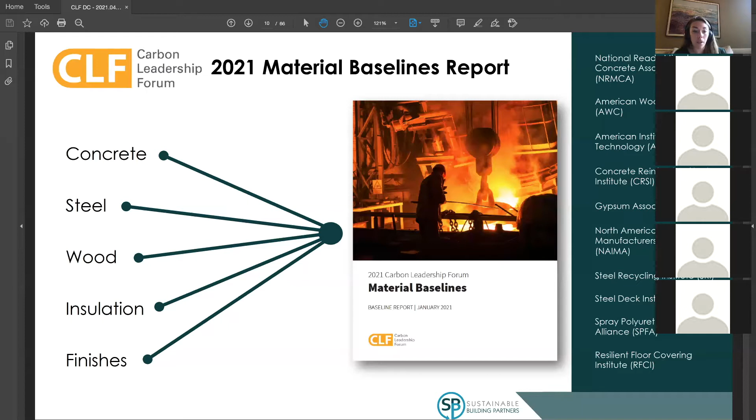We see these baselines pop up in benchmarking tools such as Building Transparency's EC3 tool. LEED has also introduced a procurement of low-embodied carbon construction materials pilot credit, where the intent is to show a reduction in the embodied carbon of materials used in the building compared to the CLF material baselines. So the CLF material baselines is a great resource for us to compare materials against an industry average and make more informed decisions on our material selections in terms of embodied carbon.

Here's a snapshot of what the CLF material baselines tables look like. They're outlined by material categories such as insulation, concrete, and steel, and are further broken down by material subtype here. Three different embodied carbon baseline levels are provided for each material subtype, like low or achievable, the typical or median, and the baseline or higher level, based on industry average carbon emissions data. Some subtypes show a wider range between the achievable and higher baseline values due to the variety of materials included. For example, in the insulation table shown here, the board insulation subtype includes mineral wool and EPS, which have varying carbon footprints.

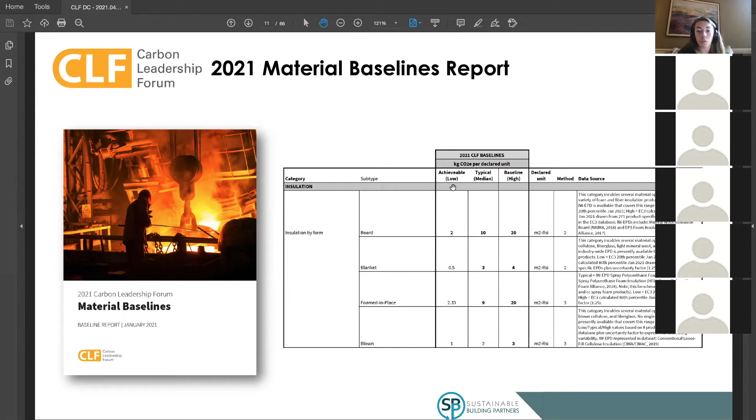The EC3 tool uses the achievable, low, or lower CLF baseline figures in the benchmark to encourage movement in the industry toward materials with lower carbon emissions.

Building Transparency's EC3 tool takes the CLF material baselines and creates an interactive tool that can be used to compare materials with EPDs against the industry average benchmark. Here's an example looking at XPS board insulation on how a less carbon intensive product can be chosen by comparing material options.

I've used the example of the original Owens Corning Foamular insulation as an early design option that is a typical chosen XPS insulation in the industry. However, if compared during design to other available products, we can find that we might be able to get closer to, or even lower than, the baseline.

You can see on the EC3 box plot that the original Foamular XPS insulation, shown here as our early design option, hits the conservative end of the graph, whereas the new Foamular NGX product hits the lower achievable end of the scale, below the CLF baseline. This is an easy example because Owens Corning has recently optimized their original Foamular product and released their NGX XPS insulation, which uses a different blowing agent, resulting in a significant reduction in GWP without any change to performance.

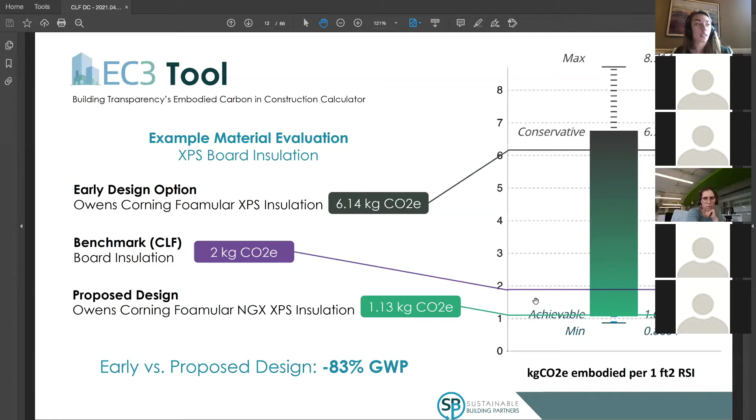The Sustainable Minds Transparency Catalog, which many of us use to find EPDs and other sustainability documents, is another tool that can be used to quickly compare products based on their embodied carbon. The Transparency Catalog reports results from the EC3 tool for products listed in their database. Results are listed as a percentile, showing where the product lands compared to others in a similar category.

We can see from the Transparency Catalog database that our original Foamular NGX, or Foamular XPS insulation, is over the 60th percentile, meaning that more than 60% of products in a similar category have a lower embodied carbon value, or kilogram CO2 equivalent, per declared unit.

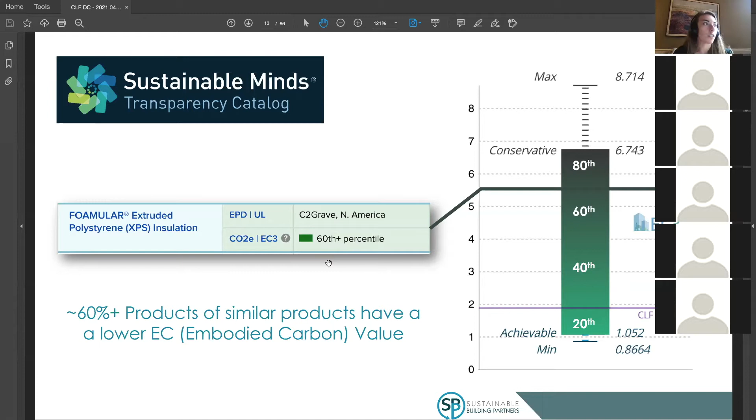With many materials we use in our buildings, comparing EPDs against an industry average benchmark is a good way to understand how our products perform in terms of their carbon footprint. However, concrete can be a little trickier since it's a complex product with a lot of variables.

The materials within our mix designs, such as aggregate, can vary based on location. We have many different mix designs to meet any and every performance requirement, such as compressive strength and exposure class requirements. In addition, the concrete PCR, or product category rule, does not include all performance requirements—it only requires concrete mixes be categorized by 28-day compressive strength. This means there are a lot of other variables not being captured in a concrete mix EPD, making them difficult to compare.

Most importantly, there just isn't a lot of data available to compare concrete mixes. Although there are some manufacturers in the area that have started creating product-specific EPDs for their mixes, such as Vulcan and Aggregate Industries, it has been slow-moving in the industry. This is likely due to the sheer volume and variety of mix designs, meaning manufacturers would have to acquire a lot of EPDs. All of these factors make comparing concrete mixes just a little bit more complex.

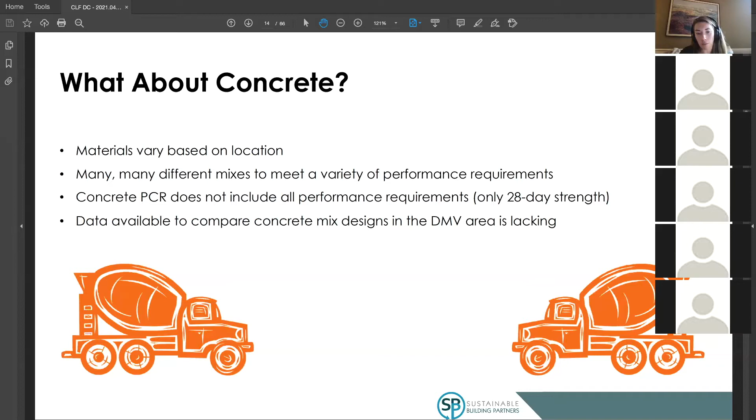So what is available to us and what can we start doing now? We do have the NRMCA ready mix concrete benchmarks that are available to us.

These benchmarks are comprised of industry average data from concrete manufacturers across the country. Even better, the NRMCA has categorized the data into separate regions, which can help to account for the materials available in those regions. For our projects in the DMV area, we can use the Eastern Region benchmark as a guide to see how our mix designs compare against the industry average data in our region.

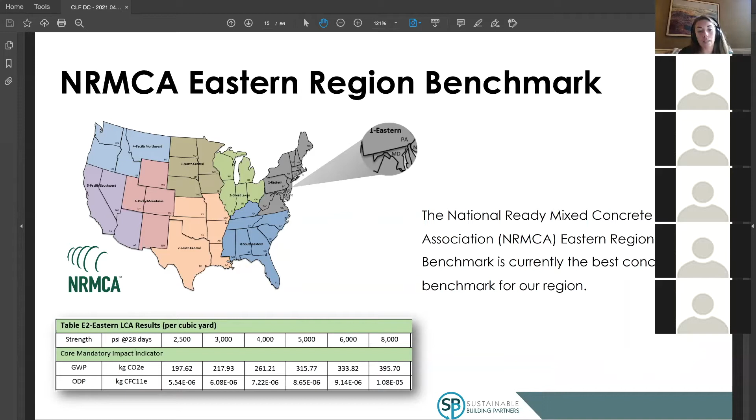Although the NRMCA data still does not account for variables other than 28-day compressive strength, it is currently the best ready mix concrete benchmark for our area.

There is also a tool available to help us compare our project-specific mix designs against the NRMCA benchmark. The ZGF Concrete LCA tool is a free interactive tool available to anyone, created by ZGF Architects using data from NRMCA and Tally.

It allows you to enter the pounds per cubic yard of the mix design components, and then the tool compares your mix to the NRMCA benchmark, whether that be national or regional. The tool can be great if comparing different concrete mix design options for a specific function, or getting an idea of what the concrete environmental impact and carbon footprint might be for the project.

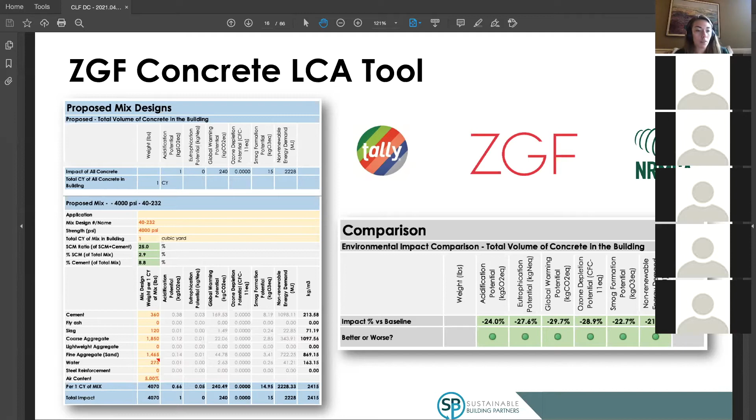It can also help to set project goals for reducing the project's concrete impact. At SBP, we are starting to use this tool to collect data on the mix designs in our area to get an idea of what is available. We hope to eventually be able to use this information to find concrete benchmarks for the DMV area.

Another great way for us to compare our concrete mix designs is to focus in on the cement used. Because cement is responsible for around 90% of the carbon emissions associated with concrete, it can be a good indicator of the environmental impact and carbon emissions of the whole mix design. With less variables in cement than in the concrete mixes that we use, it can be an easier way for us to compare and optimize our concrete mix designs.

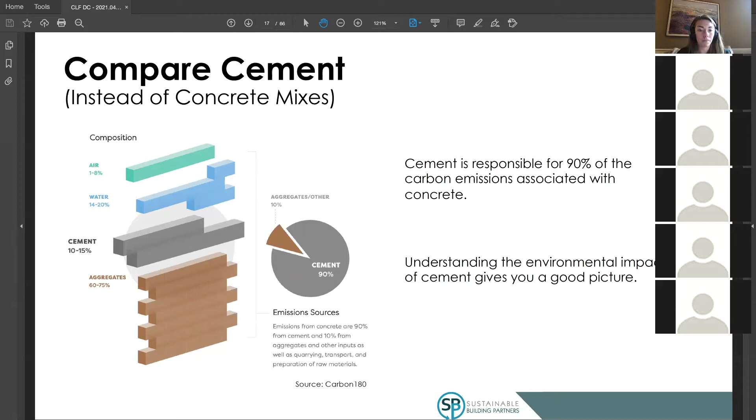As I mentioned earlier, one of the market considerations relative to concrete EPDs is that you need to create one for every mix for every plant, and that's a lot of EPDs. There are EPD generators becoming available to help streamline this process, but it's just still a lot of EPDs.

This is where cement EPDs become important. Although there are not many cement EPDs available in our area, they will likely become available soon by the cement manufacturers around. We can compare product-specific cement EPDs either to the Portland Cement Association's industry average or to other products available, without the variability that comes with the whole concrete mix design.

Cement EPDs can provide clarity on how a mix design will perform, and it's an important part of creating low carbon concrete. Bringing it back to what we can do now, we can start to request cement EPDs from our suppliers so that they become more available in the market.

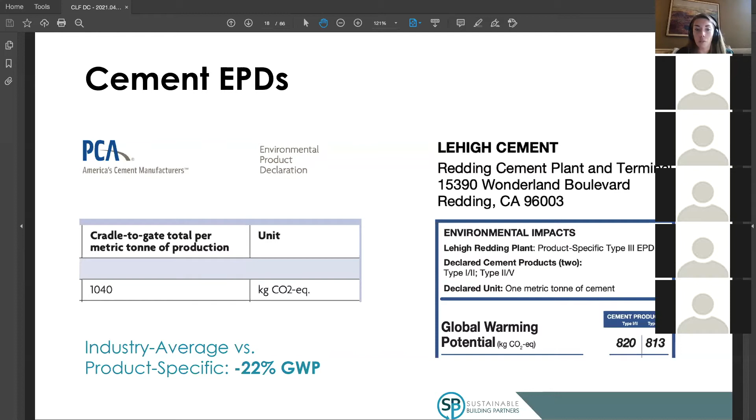Something else that we are trying out at SBP is facilitating more communication and collaboration between the structural engineer and the concrete supplier on cement management within the project-specific concrete mix designs. We have created a low cement concrete worksheet, which encourages both the structural engineer and the concrete supplier to propose a mix design that meets the performance requirements set by the structural engineer.

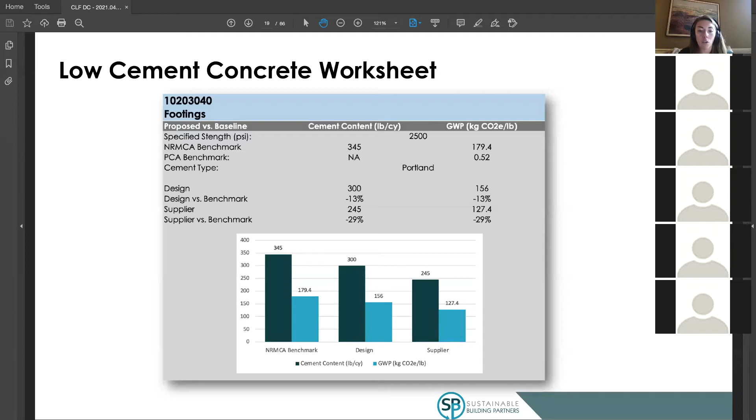The tool then focuses in on the cement content of each proposed mix and compares it to the cement content of the NRMCA benchmark. A visual representation of how the concrete mixes compare in terms of cement content and GWP is also provided. This tool is meant to be used to compare cement content against a benchmark and spark more conversation on cement management practices and strategies that can be incorporated into project-specific mixes.

So we've talked about some of the tools available to us for benchmarking and comparing materials. So how do we use them to evaluate and set carbon reduction targets throughout design? And who should be involved in the embodied carbon conversation at each design phase?

As with many things associated with design, we can have the most environmental influence the earlier we start to evaluate the project's impact. Conversely, the further in design that environmental impact is evaluated, the higher cumulative costs there may be to reach embodied carbon or environmental impact reduction goals.

However, even if a project is already in the later phases of design, there are always materials that can be evaluated and optimized based on their environmental impact.

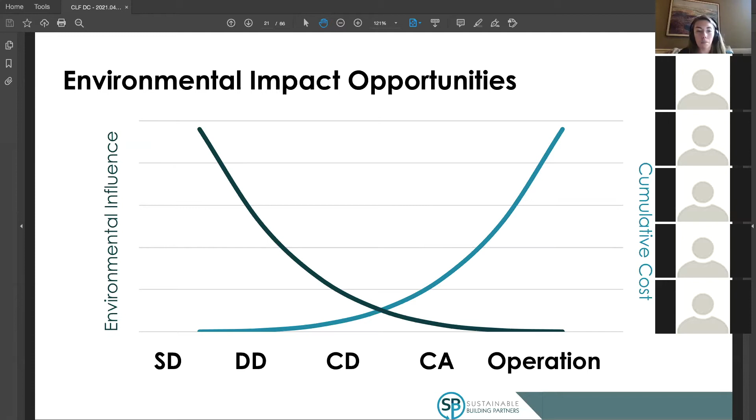Ideally, though, we can evaluate material embodied carbon at every phase of design and facilitate collaboration between all parties throughout design. Every player has the ability to reduce the overall embodied carbon in the building, and oftentimes it takes the collaboration between multiple parties. Here's a timeline that we use as an outline for what we can evaluate at each stage of design. At schematic design, looking at overall massing and structural components.

In design development, focusing in on the building hotspots or the most carbon intensive materials and elements. Once we hit construction documents, we incorporate impact reducing language into the project specifications. And in construction, submittal reviews can be performed to ensure material selections and carbon reduction goals.

You'll see that I carry this graphic of collaboration with all parties throughout the next couple slides. And that's because all players can be very influential at every phase.

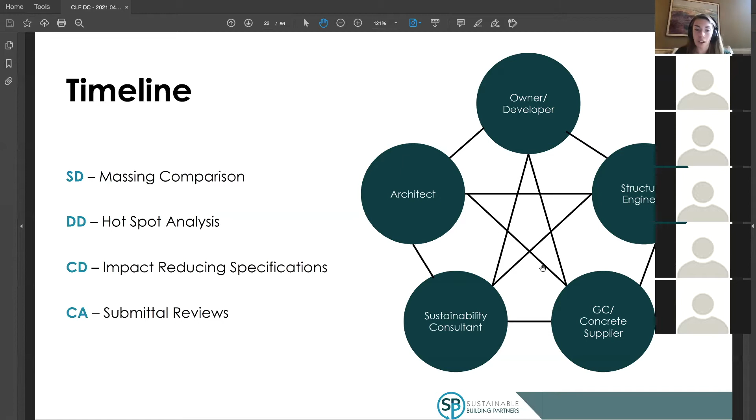Schematic design is where the greatest environmental influence can take place. Evaluating different massing options and structural designs can be huge when setting embodied carbon reduction goals. There are many strategies that structural engineers can incorporate into their design to reduce embodied carbon. Our CLF Washington DC group plans to have another event soon as part 2 of reducing embodied carbon in design to look at some of these strategies.

In terms of benchmarking and comparing the carbon impact of different design options at this early phase, there is not a lot of data yet. However, there are organizations that are working to collect data and be able to provide tools for benchmarking. One of those organizations is the Structural Engineering Institute's SE 2050 Commitment Program, which Lauren will talk about in a little bit.

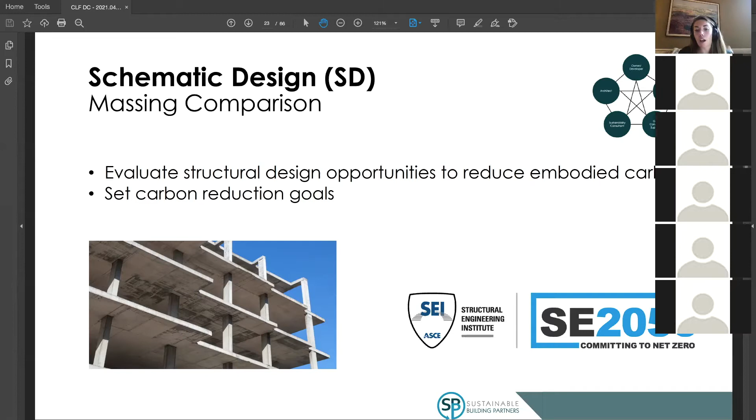As we move into design development, we can evaluate carbon hotspots in the design or certain components that are carbon intensive and may allow for opportunities to reduce impact. We can evaluate facade and finish options, different types of insulation, some structural elements if still under design, and concrete components where cement management opportunities may be feasible.

This is the phase of design where we can evaluate materials using the tools available to us to make decisions on materials with embodied carbon impacts in mind.

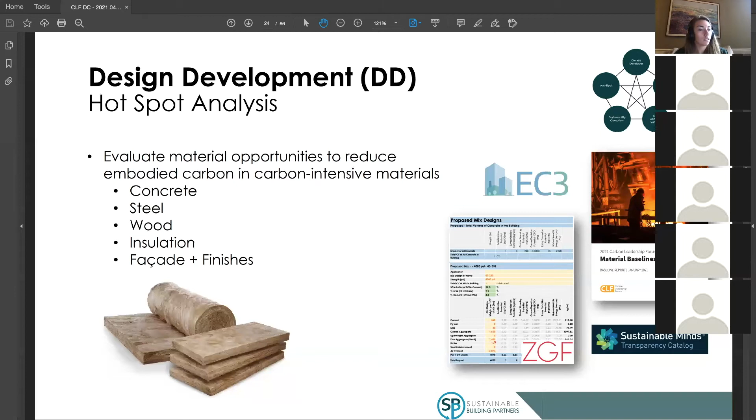In the construction documents phase, we may still be evaluating opportunities in the design and material selections to reduce embodied carbon, but start to make finalized decisions on some of those materials. Impact reducing language can be added to project specifications to ensure that carbon reduction targets are realized in construction.

Carbon reduction goals can be set and communicated through the specifications for targeted materials based on benchmarking, industry average data, and material evaluations made in design. EPDs can be requested for carbon intensive materials such as concrete, steel, wood, insulation, facade, and finished products. Requesting EPDs from manufacturers only increases the amount of data available for benchmarking.

And we can incorporate performance specifications, which can encourage innovative solutions and are beneficial for reducing embodied carbon in concrete mixes. In construction, we can perform submittal reviews to make sure that submittals are meeting the impact reduction goals set in design.

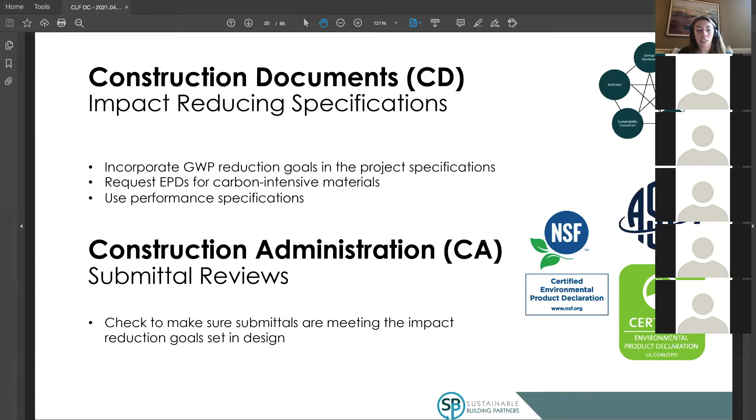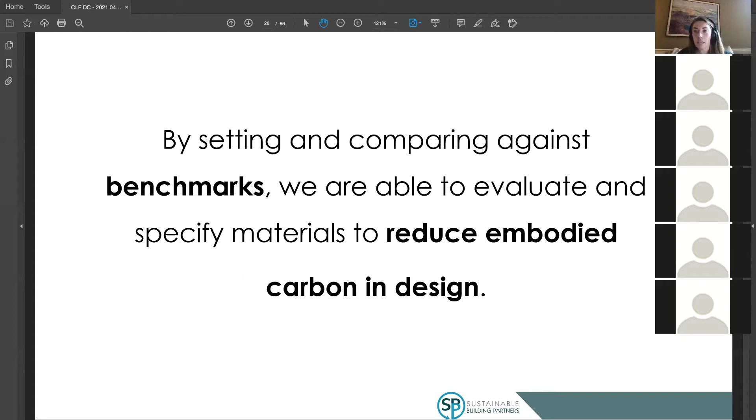To wrap up, by setting and comparing against benchmarks, we're able to evaluate and specify materials to reduce embodied carbon in design. I'm excited to see the transformation in the industry, and I think collaboration and transparency is key right now. We're still in the infancy of this movement, and we can continue to move the needle by creating more data. We can all encourage pushing for more data in the industry to make our benchmarks more available and more accurate. We could request EPDs from material manufacturers and provide whole building embodied carbon data to organizations working to provide benchmarking databases. The more data we have, the more information we all have in tackling the issue of embodied carbon in the built environment.

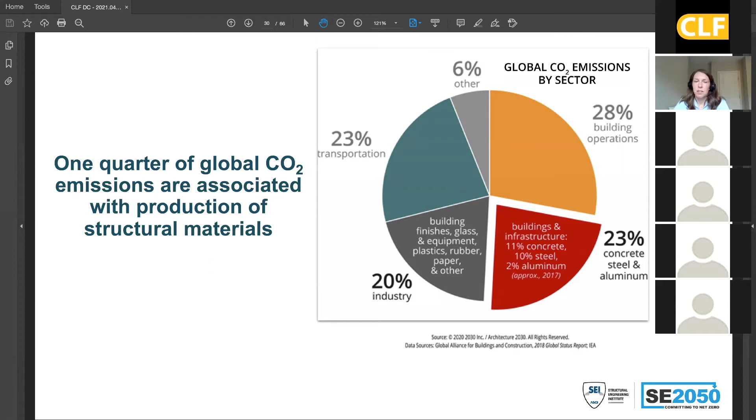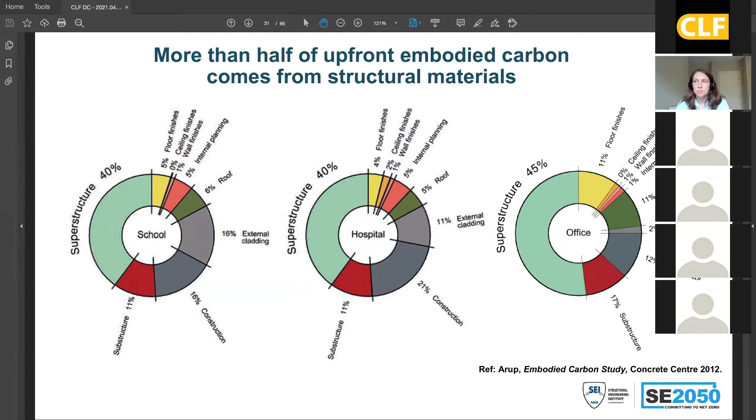This is really the impetus behind wanting to form SE 2050. If you're familiar with AIA 2030, the way SE 2050 was developed was very similar, we kind of followed what had been done previously. For AIA 2030, that program was developed in response to a challenge issued by Architecture 2030. For SE 2050, CLF issued the challenge, which was for all structural engineers to understand, reduce, and ultimately eliminate embodied carbon in their projects by 2050.

That challenge was issued formally in the summer of 2019, and it was really important that SE 2050 as a program was developed within a structural engineering industry association, because ultimately it's structural engineers participating in the program. The program needs to be based around the needs of structural engineers and structural engineering firms. So we're underneath the umbrella of the Structural Engineering Institute within ASCE, and the SEI Board of Governors formally adopted the challenge in December of that year, December 2019.

So that was the challenge, and in response we as a committee developed the SE 2050 Commitment Program, to distinguish between the challenge and the program that resulted to achieve what the challenge put forward. We formally launched our program at Greenbuild in 2020, virtually, and at the time we also released our website. So it was a pretty quick turnaround from late 2019 to fall of 2020 to having our program formally launched.

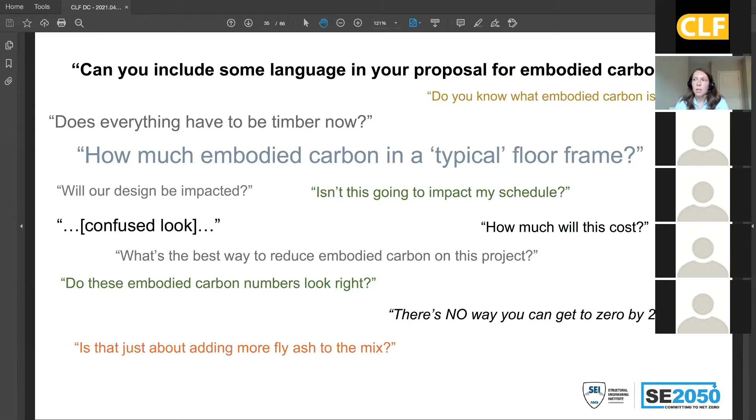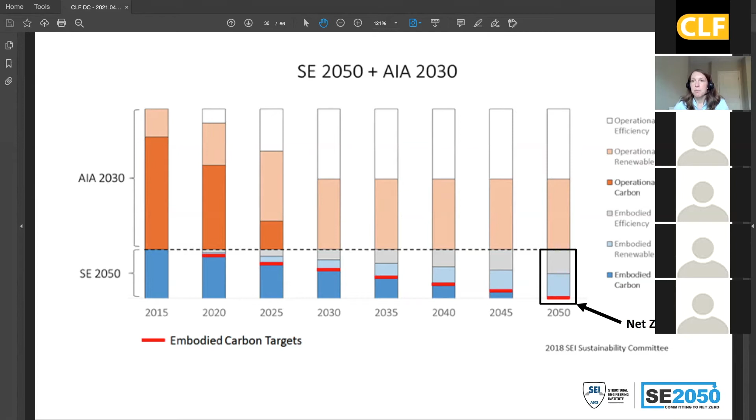A little bit about the actual program mechanics behind SE 2050. If you are a structural engineering firm interested in participating, we have three main requirements as part of the program. The first is, once you join, we ask that you submit a commitment letter from your firm leadership, to make sure leadership itself is expressing commitment to the program.

Within 6 months, we ask you to submit what we call the Embodied Carbon Action Plan. I'll explain this in further detail. That's a living document that gets annually updated, so you can look back on what you did the year before and think about further improvements.

Another key aspect is a reporting requirement. We ask you within 1 year, and then annually, to submit data to our SE 2050 database. I'll explain that a lot more. That ties into what Kirsten was explaining regarding benchmarking and data collection. I've provided a link on the previous slide if you're interested; further details are on our website.

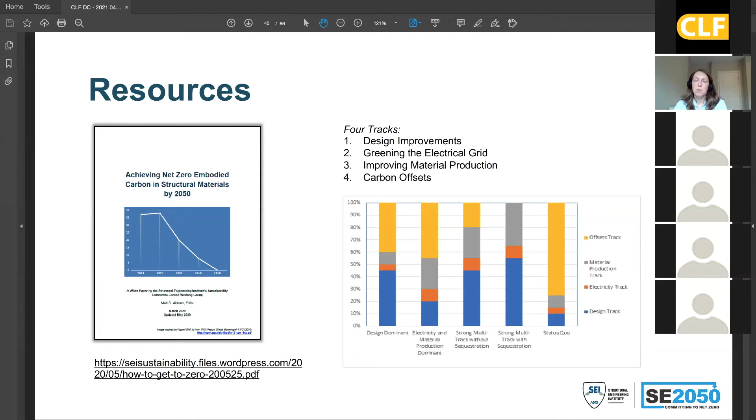These are a couple of the resources that you'll find on our website, and we've gotten a lot of positive feedback on these. So we know people in the industry are already adopting them.

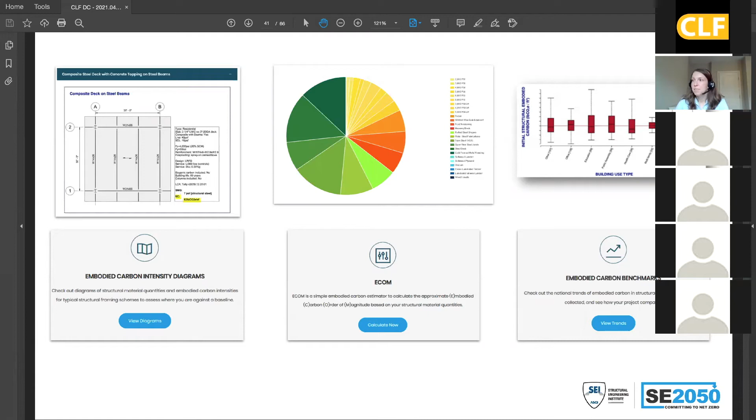So the embodied carbon benchmarks that we are going to be developing will be based off of the SE 2050 database. That is our reporting tool for firms committing to the program. I mentioned previously that we're going to be asking them to submit data annually into our SE 2050 database. This is currently in development. We're really excited about it, and it's launching in June, so only about a month and a half from now.

A little bit of background on why we felt a critical component of SE 2050 was to develop a database for embodied carbon: as probably all of you are aware, the current approach to how we perform whole building life cycle assessments is through a comparative whole building LCA via the green rating systems such as LEED. They would require you to compare your as-designed building to a reference building and demonstrate improvements.

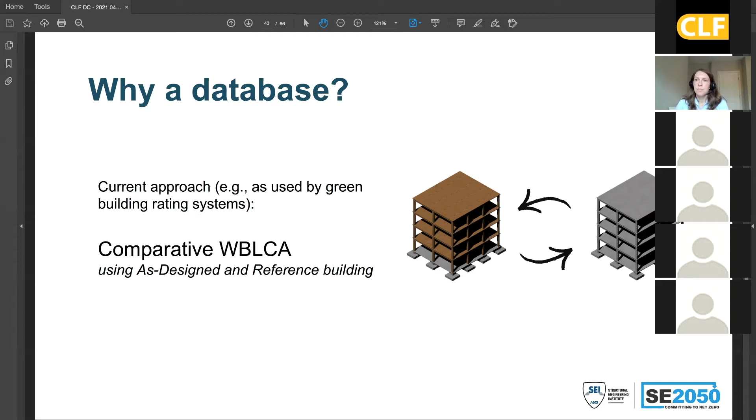So the challenge with the current approach is that if we're trying to achieve net zero by 2050, and looking at this over time, and you're doing a comparative life cycle assessment to design options you're considering internally within your firm, it's not really making a comparison overall to where we need to be as an industry. It could very well be that that building design you're proposing is performing well relative to the current industry benchmarks.

Or, of course, it could be performing worse. And it could also be the case that you have your building that you designed in 2020, and in 2030 you're using the same design and you're not improving, which is what we're trying to achieve as we get to net zero. So it's really important to be able to make comparisons to industry benchmarks rather than just internal comparisons between two options.

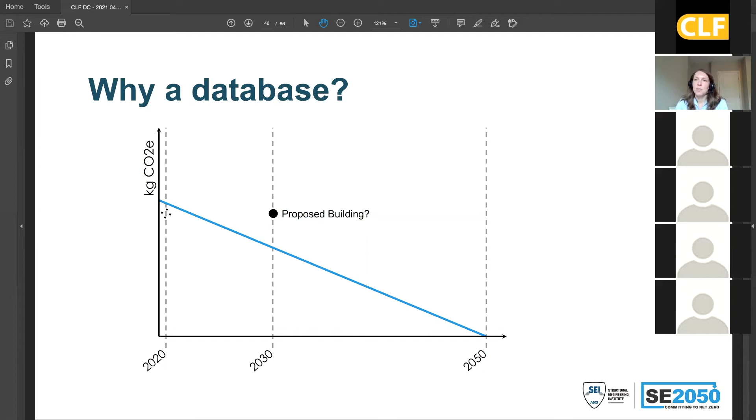So in the future, where the industry is heading, and why everyone keeps talking about benchmarks, is because we want to shift over to the concept of still a version of comparative whole building life cycle assessment, but in this case comparing your project to an industry-wide benchmark. In order to do so, what you would do is perform the LCA, report into a centralized database like SE 2050, and the output would be your comparison to the benchmark. By feeding into the database, it creates this continuous feedback loop where we can update those benchmarks and give you better comparisons as we all seek to achieve net zero.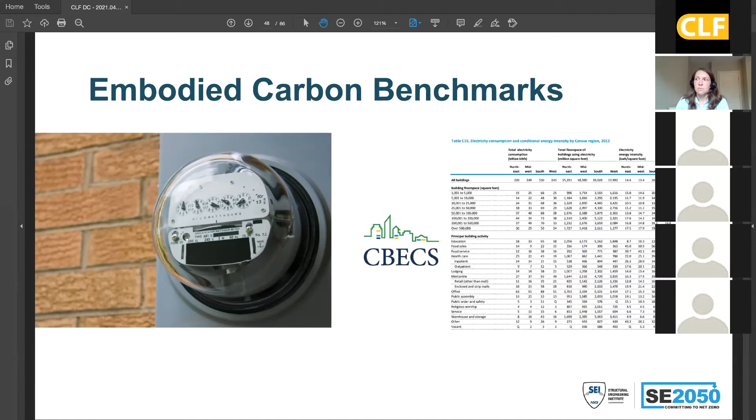So whenever I talk about embodied carbon data, I always like to highlight that there's no such thing as an embodied carbon meter that you can stick on the side of the building. Unfortunately, for operational energy, of course, they have the luxury of having metered data, and because of that, they have CBECS, which is a great database and provides a reference point for anyone wanting to understand the energy use of a building. They can refer to that database. But for embodied carbon, there's no CBECS.

And so SE 2050 is really working to fill that void. So in the future, what we hope is based off of the data being reported to our database over the next year, that we'll be able to develop these industry-wide SE 2050 benchmarks against which projects can be compared.

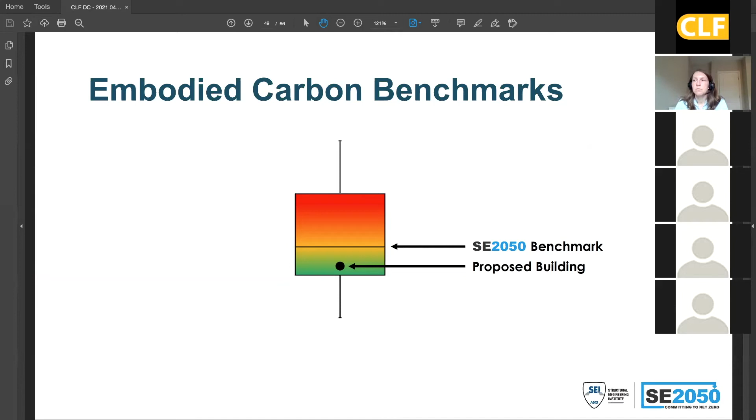So the version of the database launching in June will be our beta version, and I wanted to highlight a couple of the priorities that have led the way of our database development. First and foremost, SE 2050 is a program built on raising the awareness and education of structural engineers, and part of that is certainly to familiarize structural firms with embodied carbon reporting, getting used to different workflows of collecting embodied carbon data on projects, and then how to report that, getting used to what the magnitudes and values are that they should expect out of their different projects.

At a minimum, we really want to focus on collecting global warming potential data. I'll explain this topic a bit more in detail, but of course, what we're going to be reporting out are embodied carbon intensity benchmarks, which are based off of GWP data. So we need to make sure that we're collecting that at minimum.

And then lastly, I think a big part of what CLF is doing, what we're all doing here, is just increasing awareness in the industry as a whole and beyond about the importance of embodied carbon. And for SE 2050, certainly a part of that is raising the visibility of the need for industry-wide benchmarks. So by collecting data, even a smaller or limited data set within the first year, if we can demonstrate the fact that we can create these benchmarks, they are needed and are being used, that it will help attract focus to that need.

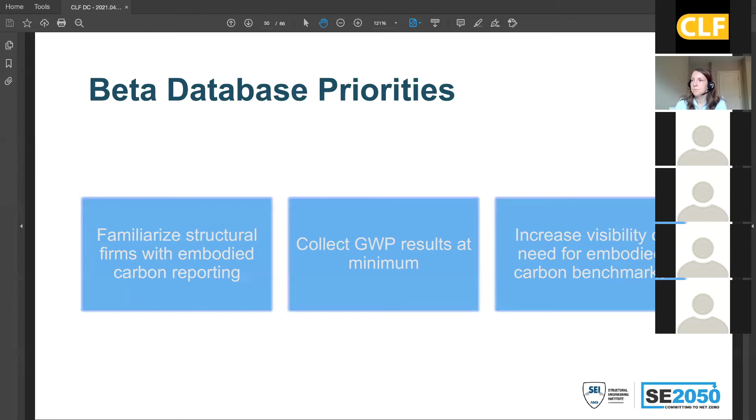So fortunately for us in developing the SE 2050 database, we do have a number of precedents that we can refer to. I mentioned AIA 2030, of course, in the development of our program as a whole, but also the AIA DDX database helped to allow us to envision what SE 2050 database could be.

Within North America, there were two previous efforts of looking at an embodied carbon benchmarking database. Carbon Leadership has one that they did in 2017, here on the right. And then deQo, this was a PhD thesis research project by Catherine DeWolf, and she developed a database that looked at structural materials specifically and embodied carbon data reporting.

Both of those previous benchmarking database efforts were with a discrete amount of data. So they collected data when they were developing the database and used that data to develop the benchmarks, but there wasn't that continuous feedback loop that we will have as part of the SE 2050 database.

RICS in the UK, they do have an embodied carbon database that's available now and does continuously update based off of information people provide to the database. What differs from SE 2050 and RICS is that we are tied to a commitment program. So we do have that reporting requirement to firms, which means that there's a mandatory reporting requirement, and we will have a continuous stream of data, whereas RICS is more optional reporting.

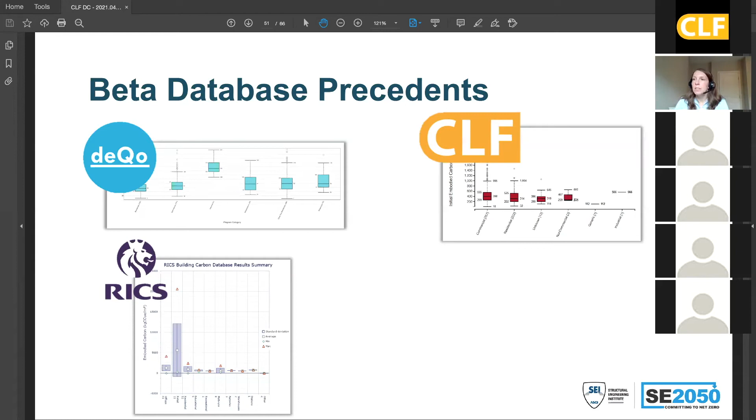So in terms of what data is being collected by the SE 2050 database, to get a little bit more into the nuance of it and understand what we will be asking of structural firms, we're asking for information that describes the structural system. We're asking for general project descriptors such as location and building use type. And then, of course, we're asking for the LCA data, so the GWP, tying that to an LCA tool so that we're making correct comparisons, understanding what stages were included.

And really all of this data that we're collecting is to make sure that we have the ability to set appropriate benchmarks. I always give the example that we wouldn't want to compare a building that's in a low seismic zone to a high seismic zone, because there has to be acknowledgement that GWP factors vary based off of different structural design criteria that may require more material intensity and therefore potentially more GWP intensity than others.

And of course, what gets output from all of this is embodied carbon intensity, which seems to be the industry-wide adopted term. We report that in units of kilograms CO2 equivalent per meter squared. Similar to what Kirsten was saying about EPDs reporting on a per unit basis at a product level, since SE 2050 is at the whole building level, we report it out with our unit basis being meters squared.

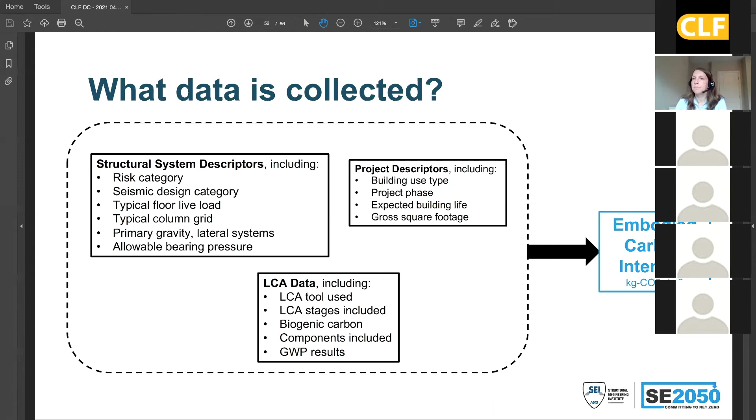I wanted to highlight the various whole building benchmarking initiatives underway. Again, there are those product level benchmarks that Kirsten covered, and this is focused at the whole building level. EC3, the Embodied Carbon in Construction Calculator tool, is looking at EPDs and collecting A1 to A3 data. They do plan to do benchmarking at the whole building level. I think that's currently in development, so we may even see that later this year.

AIA DDX now has the option to collect embodied carbon data, so you can report that as part of your project reporting. EC3 and AIA both look at structure and enclosure. EC3 covers structure, enclosure, and then some if you include interior finish materials. For SE 2050, reminder that we are focused on structural materials only.

Similar to AIA, we're trying to collect that whole building LCA, looking specifically at modules A through C. For those of us on the call who are really nuanced in life cycle assessment, I think it's important to understand the differences in data collection across each of these benchmarking databases, and what that means for the future of what data we'll have available.

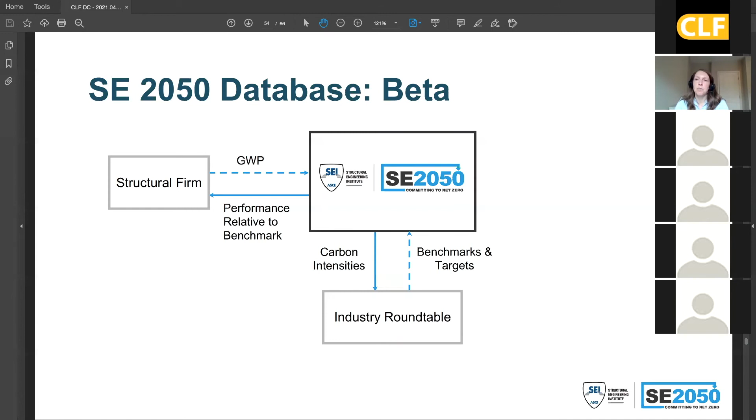That provides us the ability to report back to structural firms participating in the program what their performance is relative to the benchmark. That helps them meet their commitment goals in terms of the embodied carbon action plan I described earlier, and helps firms reflect on how well they performed within the past year and what they could potentially do to improve in the future as we seek to achieve net zero.

There is large data variability within the LCA industry as a whole. We know a lot of this comes from different LCI data sets, since we don't have a publicly centralized LCI database that all the different LCA tools use. Instead, we have these proprietary data sets that vary a lot, and that creates a lot of variability in the results.

Certainly part of what we're doing within SE 2050 is trying to collect as much data as possible in order to help reduce that variability.

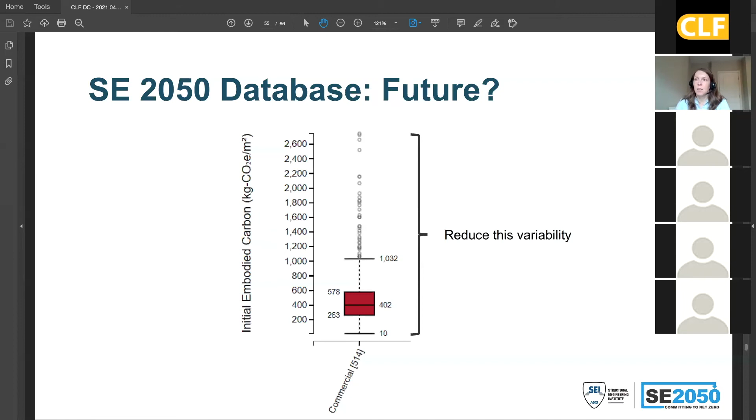Another way that we think SE 2050 and structural firms can help reduce that data variability is to focus on what we know best as structural engineers, and that's the structural material quantities.

Certainly in the future, as we further develop the database, one thing we're interested in is having firms submit structural material quantities. What that allows us to do is use a single backing LCI data set against those material quantities, helping reduce variability on the LCA side of things, and getting consistent structural material quantity reporting in order to reduce that variability.

But essentially the way it's structured for structural firms reporting to the database would be the same -- instead of GWP, we'd be focused on structural material quantities and still report out the benchmark.

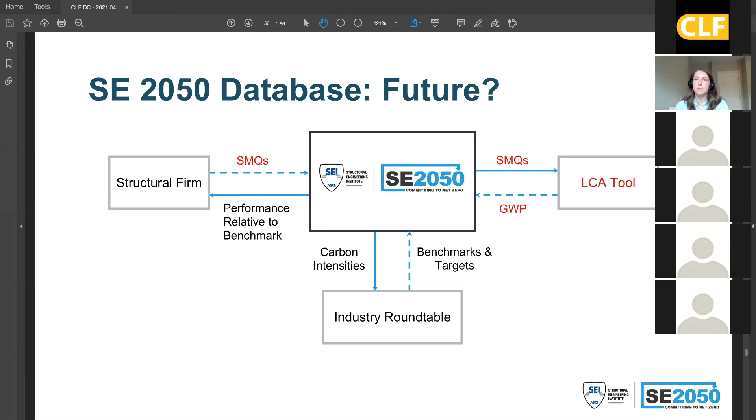So with that, that's the end of my coverage of SE 2050, and I'm happy to answer any questions people have about the program overall.

Lauren: I think there's one question in the chat. It's from Joel: how is cost typically evaluated in all the design phases parallel to carbon impact evaluation? It seems to require close involvement of a GC.

Sure, yeah, that might have... Kirsten, do you want to help answer that? I have some thoughts as well, that probably ties in more. Yeah, I think I saw it, and Joel, please feel free to jump in if you have any more clarity on it, but I think I saw it come in response to one of your slides.

Okay, yeah, I can respond to that. So, I mean, I think in terms of cost evaluation of different embodied carbon reducing strategies, as a structural engineer, in my experience, and on the previous CLF webinar focused on concrete and specifying concrete materials...

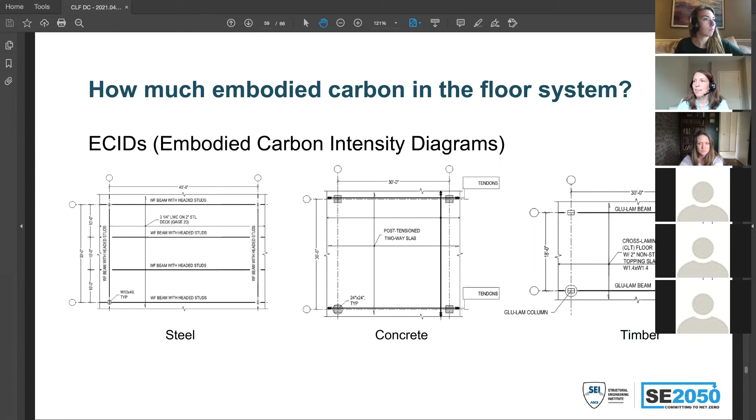These are the embodied carbon intensity diagrams I mentioned earlier. I think I misspoke earlier when I said it was four, it was three: steel, concrete, and timber. We looked at typical structural bays and the different systems you see with each, like conventional steel beams and composite metal deck, a post-tension slab, and then CLT over glulam.

These were the results from those studies. I mentioned earlier that a number of different designers looked at this, so there was variability even in the structural material quantities. We also ran it through multiple LCA tools, and there's variability in that LCA data as well.

You can see on the previous slide, typical system weight for a structural system is around 50 pounds per square foot. As a result of our study, there was a range because of all that variability and how the data was collected, ranging from 19 to 27 pounds per square foot of embodied carbon. So if you want to ballpark the embodied carbon intensity of a steel structural bay, it's around 25 PSF.

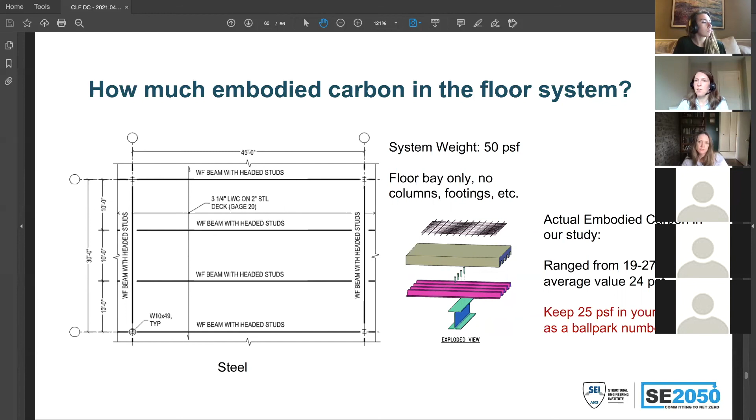PSF is kind of a weird number, I think, for embodied carbon, since the metric we typically use is kilograms per meter squared. But in terms of relating that back to the system weight, it's a good number for structural engineers to get a grasp of, and you can always do the conversion on the back end.

So for concrete, it's a heavier system in terms of the system weight itself, and also in terms of embodied carbon intensity, which I think we'd expect. Again, a range of 25 to 37, but let's say this one averages more like 30 PSF for concrete, more than the 25 we saw for steel.

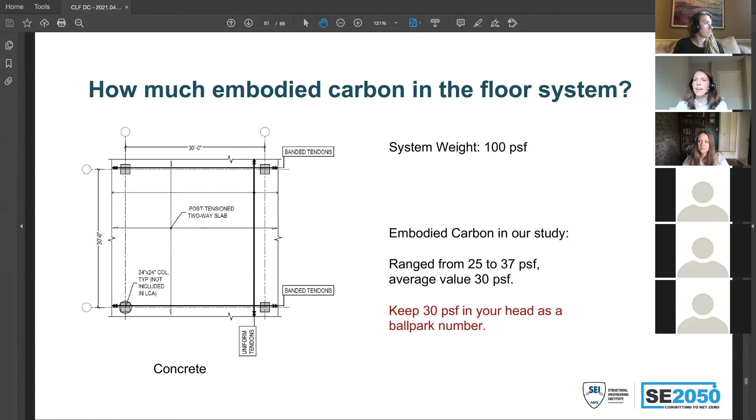Okay, so then if we get to timber. So what do people think the embodied carbon intensity is for timber? Steel was 25 PSF and concrete was 30 PSF. Maybe you can enter some guesses into the chat.

And don't be shy, because I mentioned there's a lot of variability in this stuff. Any other guesses? Okay, these are good guesses.

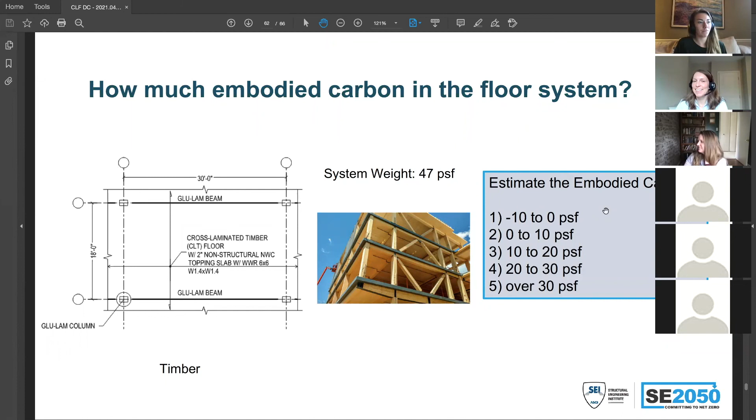Okay, Joel's skipping ahead to the answer. It does vary a lot because we know the LCA data varies. If you're not considering biogenic storage, it's close to 20 PSF, which I think is interesting—so it is overall lower than steel and concrete, 25 and 30 respectively. I think sometimes people think timber, because of carbon sequestration, is basically zero. If you do consider biogenic storage, that would be negative, so -5 PSF. Of course, there's a lot of discussion on how we treat biogenic carbon, considering different LCA practices.

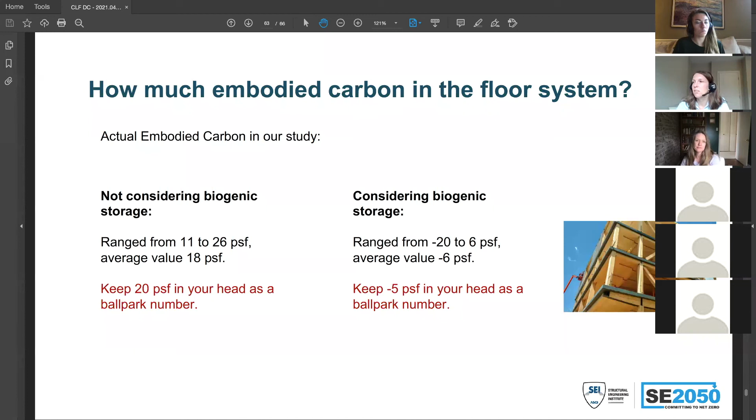If you go to the next slide, we'll close it out with one to further highlight the impact structural engineers can have in reducing embodied carbon. I like to show this one a lot to students because they find it pretty fun. For this conceptual project, let's assume you have 100 concrete trucks delivered to site and you're achieving a 20% carbon reduction in concrete mix, which is very achievable—not even that crazy big of a project, 20%, not that crazy. How much do you think you can achieve?

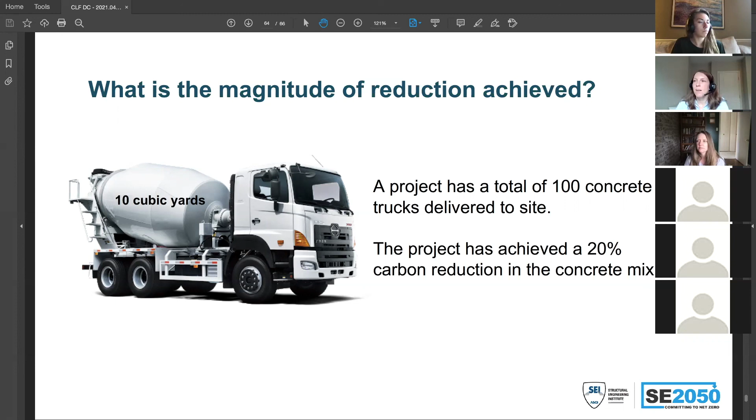We'll relate the reductions in terms of how many cross-country flights you would have to avoid in order to achieve the same offsets. This is to try to think about the decisions we make in our personal life that we think have a huge impact on embodied carbon, relative to what we could do as building designers. So how many cross-country flights would need to be avoided to achieve the same carbon savings?

Okay, giving a range of answers. Other guesses? Okay, if we go to the next slide.

Popular answer—a lot of people got this one right, which was good and probably speaks to the expertise in this group: 25 flights. When I heard that, I mean, it's kind of crazy. You could work your whole life on your personal decisions to try to offset even changing the concrete mix on one floor of your project's construction. So keep that in mind.